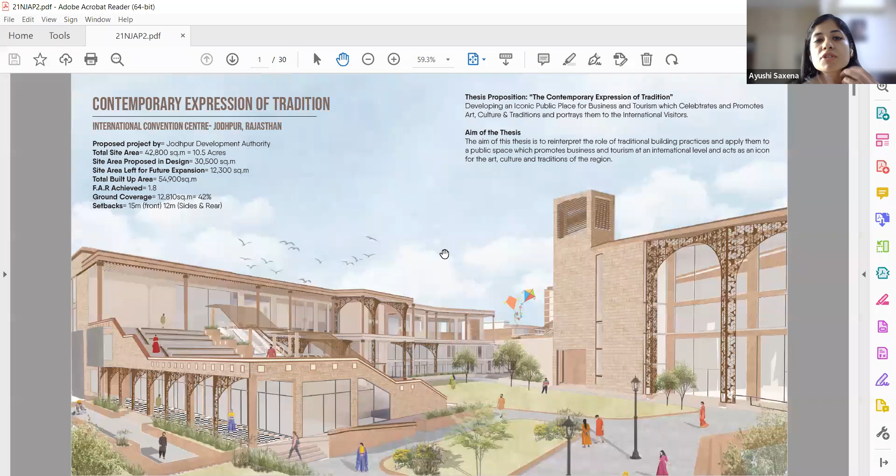For me, I felt that with the effects of globalization all around, everything is becoming too standardized. Especially living in Delhi, looking at the Gurgaon buildings, it was all international standards. Somewhere we were losing out on what our Indian traditions and cultures are and how they are manifested into physical spaces. That really touched me, and that is why I chose this topic.

Then I picked up the International Convention Center because it was a great way to represent this proposition in the form of a project. The thesis proposition read as: developing an iconic public space for business and tourism which celebrates and promotes art, culture, and traditions, and portrays them to international visitors.

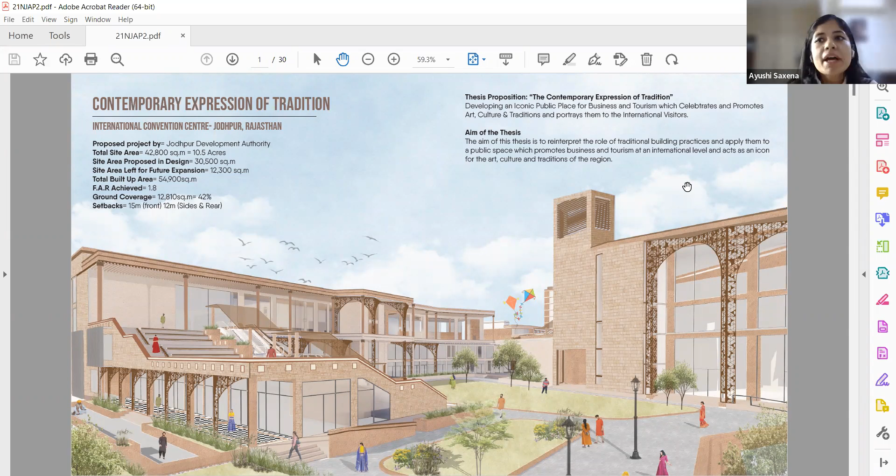So that was the thesis proposition. When all of you are choosing your thesis proposition, keep in mind that it should be something you're really, really passionate about.

For the thesis, we had our dissertation in the semester prior, and I had chosen a topic on similar lines: the remnants of tradition in contemporary sustainable building design. I studied around 9 buildings located in areas with rich cultural and traditional heritage, and how tradition is manifested into contemporary buildings and what architects are doing there.

Because it was a semester-long project, it gave a nice research background to my thesis project in the semester ahead. So if you've already done your dissertation, and it aligns with your interest, it could be a good idea to take a thesis topic that relates to it, so your dissertation research can back up your thesis.

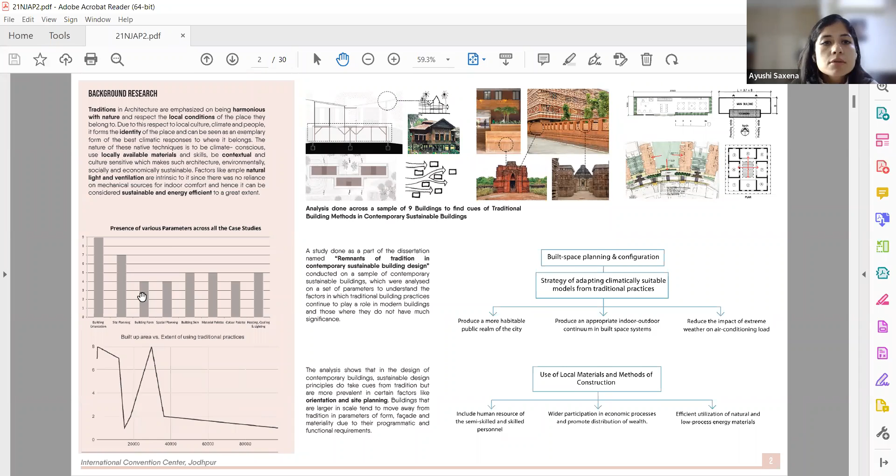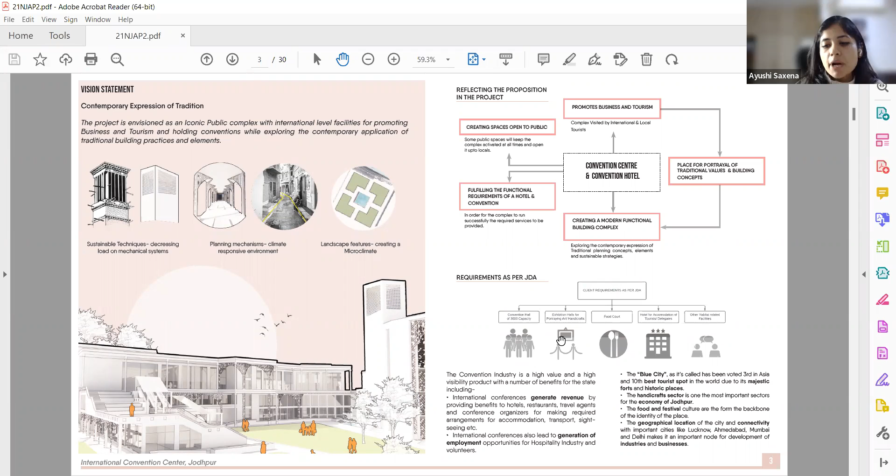Coming to the main building I designed, it was a proposed project by the Jodhpur Development Authority. They had already given certain specifications for what they wanted in the project, which was a convention center, a hotel component, a food court component, and stuff like that. From there, I started understanding what components would be part of my final project.

To start the project, it's very important to begin with certain research, so I decided on 4 topics to research before beginning. Because when we're given a blank site profile and just start with whatever comes to mind, we don't really have information to back up our designs. That's why research becomes very important before you start sketching and designing.

The topics I chose were: interpretation of tradition in contemporary buildings, specific to the climatic conditions of my project. My project was in Jodhpur, a hot and dry climate, so I looked at similar desert regions and modern buildings there. It wasn't restricted to Indian buildings—I also took examples from UAE, which has a similar climate, to see what architects are doing in contemporary buildings nowadays.

The second topic was climate responsiveness in hot and arid desert climate architecture, to understand what strategies people adopt in such conditions. Then there was understanding Jodhpur itself—its handicrafts, the culture specific to that place and to Rajasthan in the bigger picture, and how they've carried forward their traditions since ages.

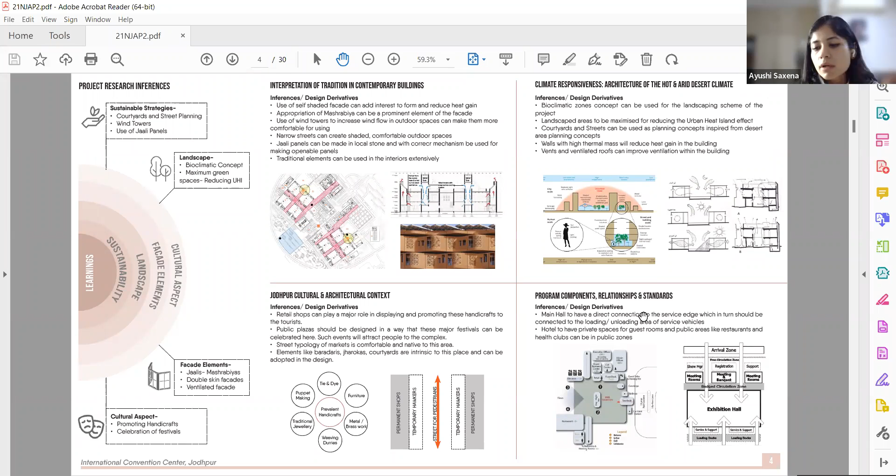To move ahead, I did certain case studies. Since the major components were the convention center and hotel, I took case studies under both categories. For convention centers, I took the Hyderabad International Convention Center and the Jaipur Exhibition and Convention Center. One important thing is to take an international case study too, because it gives you perspective on what's happening beyond the country and what else you can adopt.

To make the design stand out across the world, I took an example of the Vancouver Convention Center, which is very famous. There were certain insights I could draw from these case studies, such as having a public edge and a service edge in the convention hall.

Then the convention hall, which is the main hall where all the activities would be taking place, should be divisible, because there might not be a function at all times for 500 people. There would be ceremonies for 100 people, 50 people. Should be divisible. All services should be accessible to all parts of the division. So these were some takeaways which were really important in understanding the functionality of the convention center.

Then I went ahead and explored some examples of hotels, one of which was the JW Marriott in Delhi, because I could physically visit this. Also, our thesis was in the times of COVID, so going physically to sites and seeing projects was not possible for all of them. But whatever online material I could get, I did the case studies from that. But I think for you guys, it's now possible to explore and go out and see buildings physically, because that really helps you in understanding what actually a project is going to be like.

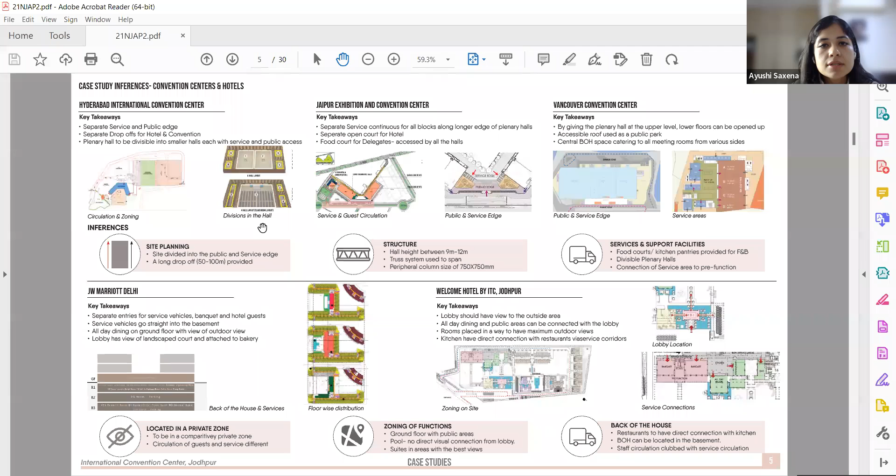So that was about the case studies. Then I went on to develop the area program after having enough insights from the case studies, from the research, etc. So like I mentioned, the major components of the area program were already given out in the tender document, which I had found online for this project, which was a government tender. However, there were some functions which I introduced on my own as well, because I thought they would be very important to first reflect my proposition into the convention center, and also it would help in generating employment for the craftsmen and other areas.

So that's why I proposed some functions on my own as well, and did not take the tender document as the final script for the area program. So I had a hotel, a convention center, some exhibition halls, some retail component, which was something that I had proposed on my own. And I also dedicated an area for future development, because when I did the mathematics and added up the areas for the different components which were there, it did not meet the FAR which was allowed for the site.

In your jury, there would be a question if you're not achieving your entire FAR, because there's a lot of money involved in such large projects, and now we are trying to design as real a project as possible. So it's important to keep that business aspect in mind as well. If you are not able to achieve the full FAR, which is totally fine because we have limited time and in 4 months it's not possible to do everything, then you must have a certain plan or area dedicated for future development, in which one might use the leftover FAR.

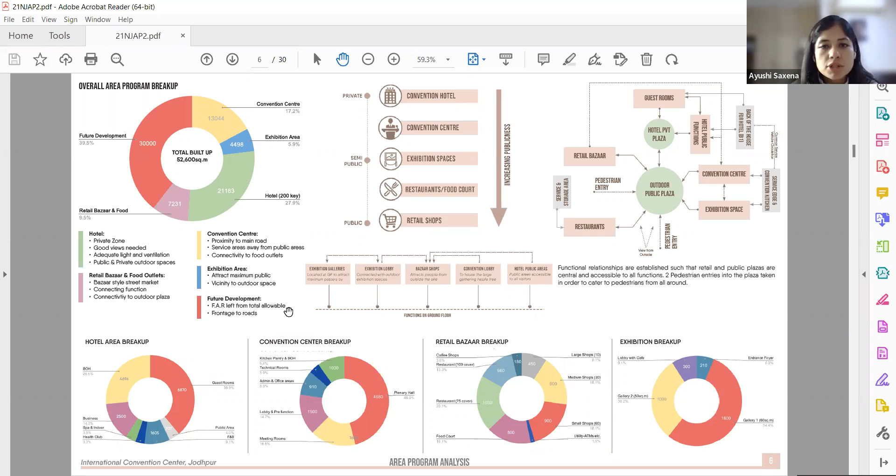So that is something which my faculty had told me very initially, and something which I kept on in my project. Then after having all the background insights in place, I went on to understand what my site is like.

So then I did a site analysis to understand where my site stood in context of the entire city. In my project, the tourism aspect was very important, so it was important to see where the hot tourist spots are, and where the airports and railway stations are, because these were the nodes where tourists would come from to my complex. For instance, if someone is designing a school, they might look at the location of other schools or residential areas, since that's where the main users come from. So it's important to understand where your site sits in context of the entire city.

Going into a more micro level, I did a climatic analysis where I looked at the sun direction and the ideal orientation for my buildings. I deduced that a north-south orientation would be best to cut down heat in such a hot and dry area. So the orientation was important, and I also analyzed the wind direction.

And I looked at the views, because it's a touristy sort of place, so the views of the entire city became really important. People would want to stand and experience the entire city at once, so that was also important.

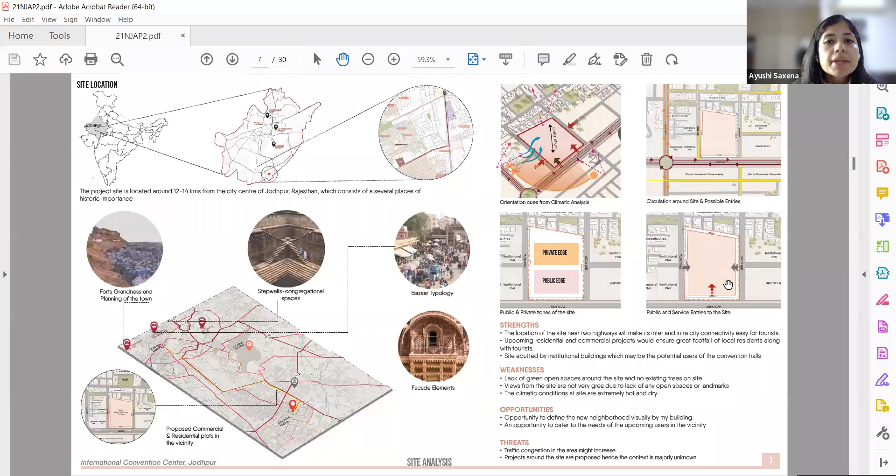Then, to finally put all these thoughts, the background research, the area program analysis, and the site analysis to paper, I started taking certain concepts and inspirations from traditional structures, because at every stage we have to remember our proposition and what we wanted to do in the first place. So I looked at a few examples of traditional forts and palaces in the region and got inspired by their form.

Then I started putting all the masses, which were a function of the area program, and placed them on the site, introducing courtyards because this is something I'd seen in traditional buildings, which helped me arrive at the final form of the place. So as you can see here, this is the final concept diagram I prepared for my design.

If I had shown this concept diagram on the very first slide, there could have been a hundred questions -- why is this placed here, why does this building look like this or that. But for each and every thing, you need to have that why, that answer, and for that, the background research is really important.

So all the slides I showed before this -- the case studies, the research, the site analysis -- all gave me the factors to put into the site and have an answer for each and every design decision. It's very important to pay attention to the part happening before your sketching on site, because that's what gives you the basis for the design.

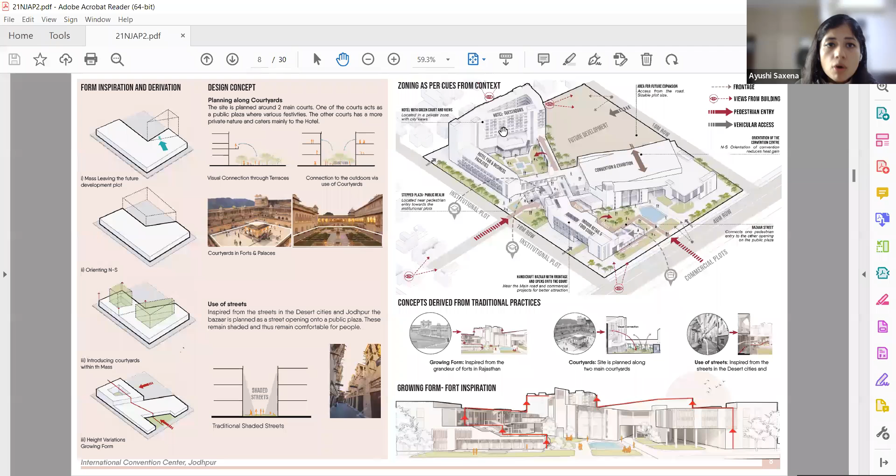So all those ideas were put together into this concept diagram, and this is what I had formulated. This is also the design development of my entire design.

Initially, it started with a very basic thermocol model. Thermocol models are a really good tool to iterate -- even SketchUp is great, but thermocol models give you a lot of flexibility, because you can cut out those masses and place them in multiple ways. It just takes a few seconds to place them like this or that, and you get a much clearer idea of what your form and functions look like.

So at the first stage, I had done the planning and concept development, and as you can see, the future development plot was here initially.

Then I understood the strengths and weaknesses from this design, and took them forward to the next stage, where I did some planning of the functions within the blocks, and also changed the overall site planning.

So at each stage, your aim should be to maintain the strengths from the previous stage, remove the weaknesses from the previous stage, and also move a step forward in the design process.

That should be your aim with each of the submissions planned for you. And then, in the later stages, the spaces were detailed out, the landscape was integrated, some facade details were also integrated, and so on.

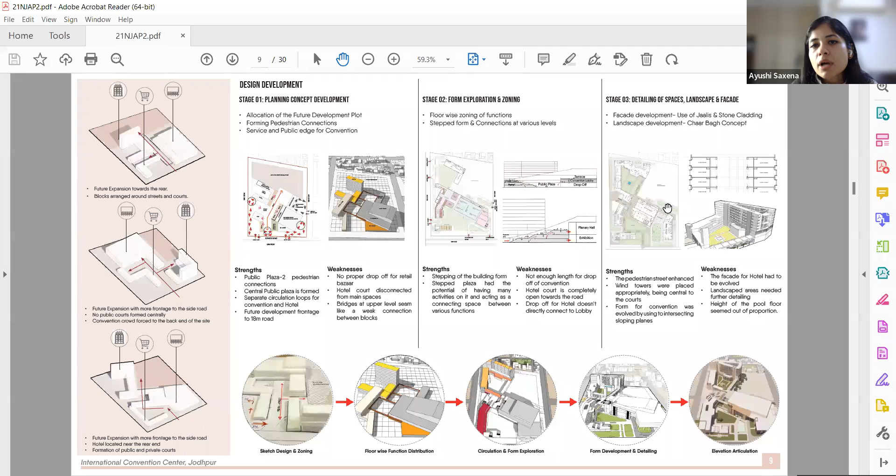So now coming to the final design drawing. This is what the entire complex looked like. This is the site plan of the site.

And this is the most important plan, I would say, which you would present in your final work. And this would take the most time to develop also.

So here, like I mentioned, I took the entries for the convention center from the main road. This loop had the exhibition drop-off as well as the convention lobby drop-off.

Then for the hotel and retail, the entries were taken along this edge. The service entries were taken along the right side edge for the exhibition and convention, because these require a lot of servicing. Also, the site was developed along two courtyards, two main plazas.

One was this public plaza, which was of a more public nature, with more public functions around it. And the hotel plaza was imagined as a calmer space, dedicated to the hotel functions, with a more...

...very formal sort of landscape design, in the Chaar Bagh concept and stuff like that. So this was the final site plan for my site.

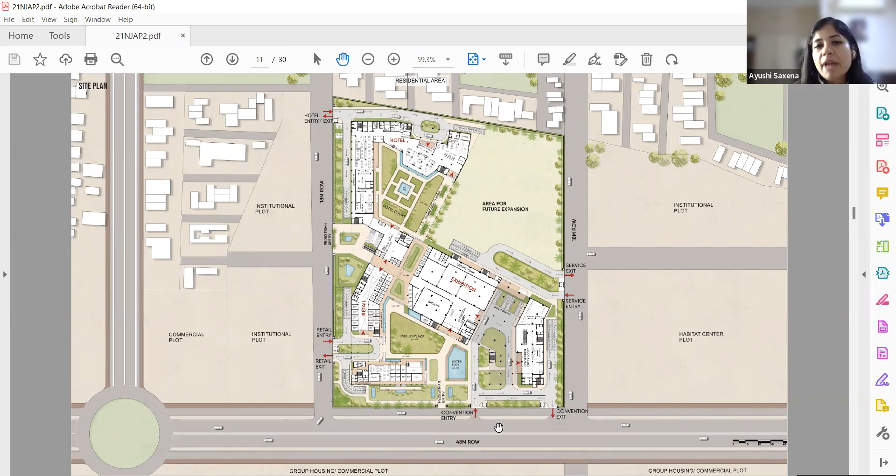And I would advise everyone, if you're spending maximum time on any plan, that should be your site plan. It should look very well thought of.

Then coming to the floor-wise program distribution, such a diagram, an exploded axonometric, really gives the viewer a good understanding of how you have divided the functions floor-wise.

So for me, in the hotel part, I had the lobby area on the ground floor and the all-day dining on the lower floor. Then followed by the specialty restaurants and then the business center, above which we have the spa and pool area.

And on top of it were the rooms. So the most public functions, accessible to all, were on the lower floors, and others were on the upper floors. And all these insights you gather only by doing case studies of similar buildings.

And I think that should be your source of inspiration for understanding the functionality of any kind of function.

Then for the convention center, I had the exhibition lobbies at the lower floor, because these would attract more public, rather than the convention center, which one would visit only for a meeting or something.

And then we had all the ancillary facilities and the admin areas above it, and then the main convention plenary hall at the topmost level.

It's important to put in all your admin areas, service areas, etc. into your design at this stage, because that shows your understanding of the entire component you're designing. So that's something to keep in mind.

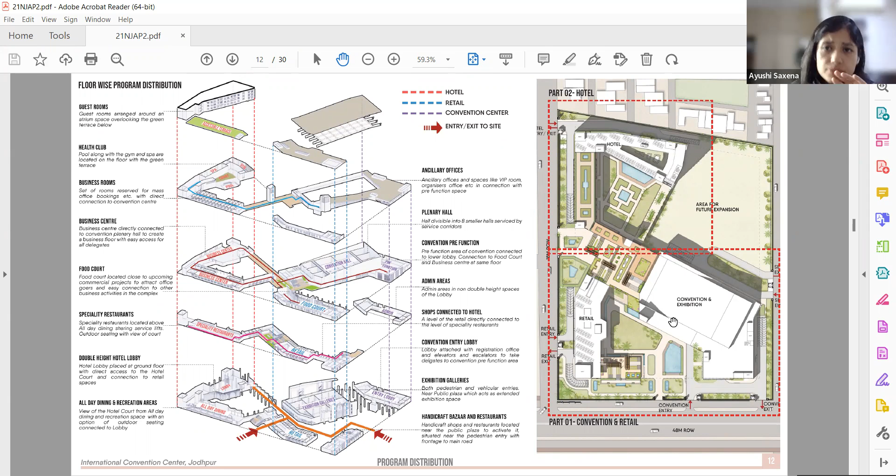So I'll begin with the convention part of the site. So here we can see...

...how the retail street starts from the pedestrian entry itself, and then continues over here and goes on till the hotel also. These are all the outdoor shops which line this pedestrian street, and it curves around the public plaza.

So when a pedestrian enters the site, they can experience all these shops and the festivities happening in the public plaza.

Also, there was an indoor retail component given because there are certain jewelry shops and gemstone shops which are very important for a region like Jodhpur. So these needed a more private and an indoor environment, and they were given in the indoor shops. And then obviously we can see the exhibition galleries and the convention entry lobby, which goes on the above floors.

Also, for the purpose of the presentation, I had actually highlighted the very key parts of the plan because when you're presenting in your thesis jury, you'll have like 10-15 minutes to present your ideas, and at that time it's not possible to talk about each and every part of your plan. So it's very important to highlight what are the main features which make your design stand out, and then it's important to graphically also highlight them.

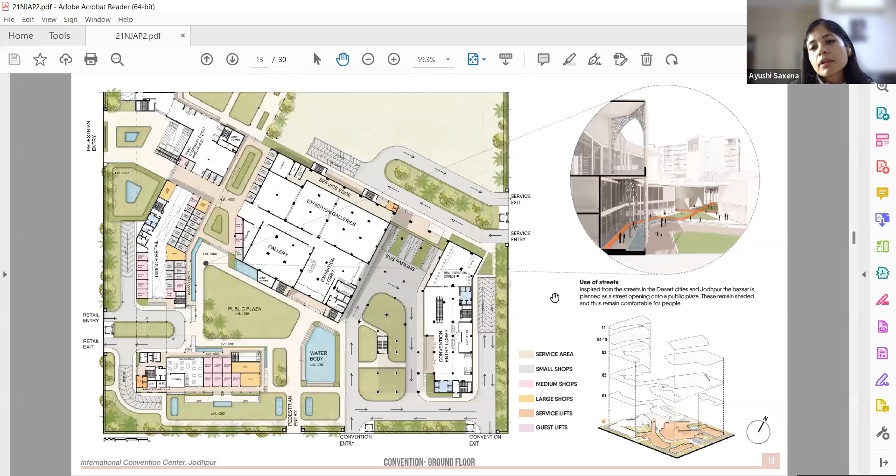Like here I've talked about the use of streets, which is a traditional planning concept also. So this was the retail bazaar street. It also had, because it was a multi-level thing, it was stepped, and these terraces were all also accessible, which were inspired from the stepped gardens in forts and palaces.

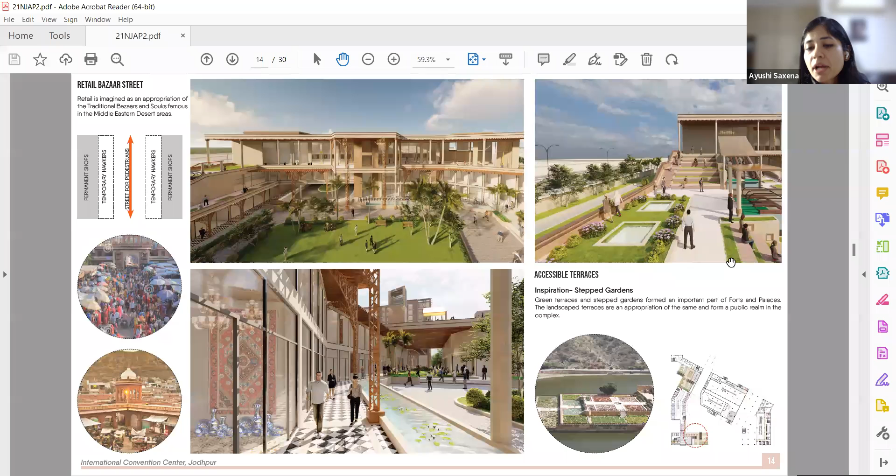Then coming to the above floor, we can see how these terraces have a visual connection to the public plazas on the ground floor. So the visual connectivity was important over here. And other spaces we can see are all double height spaces on this level.

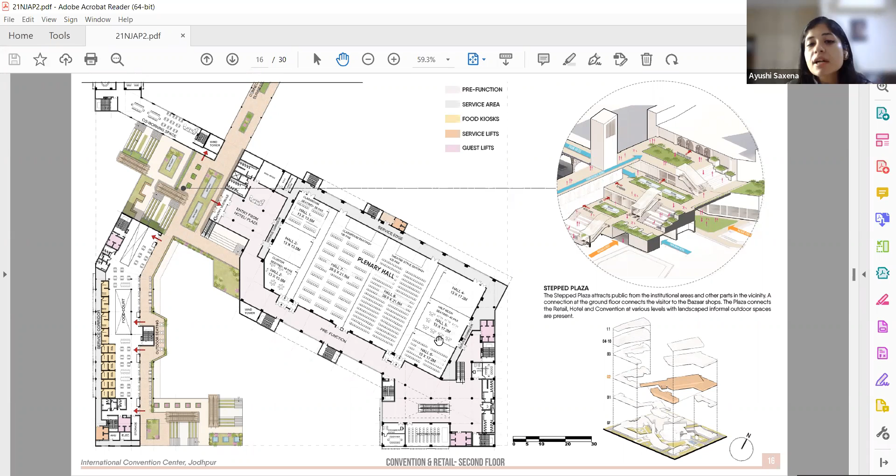And then this floor had the food court and the plenary hall, and also the location of the food court was very strategic because there are breaks in between the meetings when the delegates are coming to the plenary hall, and then they have to go out for a lunch or something, and then the food court comes very handy.

Also, the stepped plaza is a place where these people can relax in between the meetings, and also the positioning of it was kept over here because it was closer to the institutional areas, and the students could come here as it was a very porous site, and they could relax in their free time. So that is why it was positioned like this.

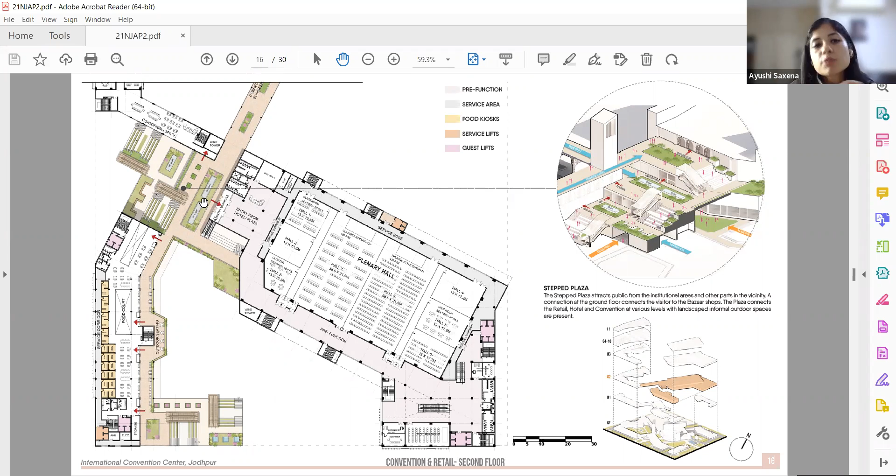This is the view of the stepped plaza. All these 3Ds and renders I had taken out to explain what the spaces would ultimately look like.

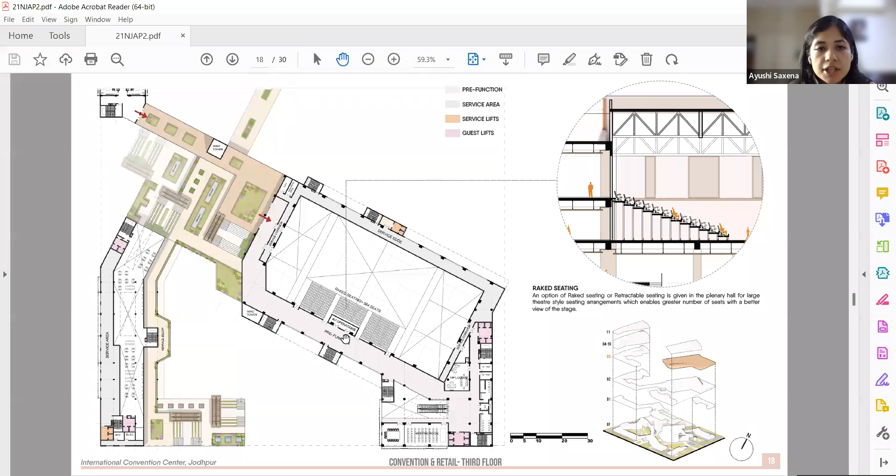This is a section through the plenary hall which shows the trussed roof and the sloping roof of the site.

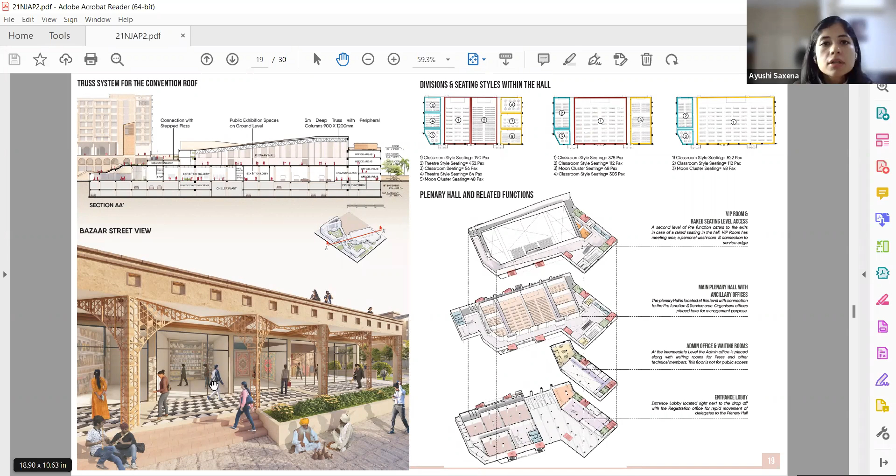Also here we can see a view of the bazaar street, which is the retail street, and how the artisans and the local craftsmen are also getting employment and are getting promotion and recognition because of the introduction of this area program feature. So that was about the convention hall.

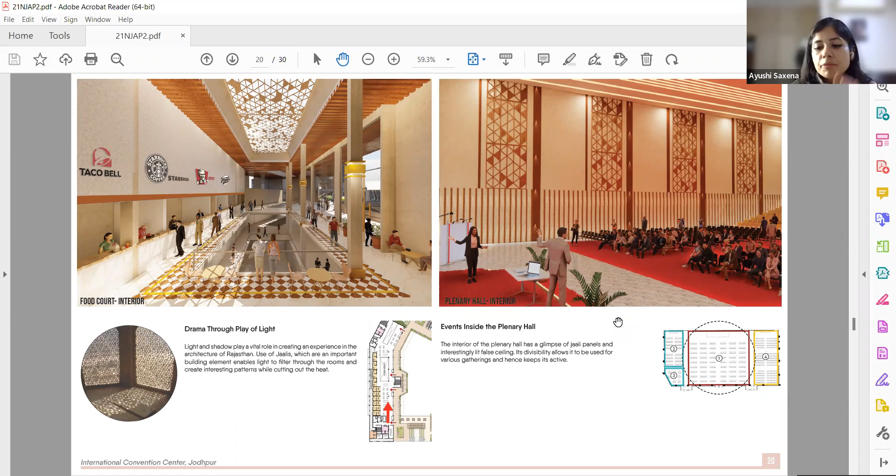These were not something which was just plunged onto the facade, but they were also very well thought of in terms of how the visual quality of it is going to be like and how it's going to look within the entire form. So something which is a norm, a bylaw that you have to give, can also be very well articulated in your design. That is something we should keep in mind.

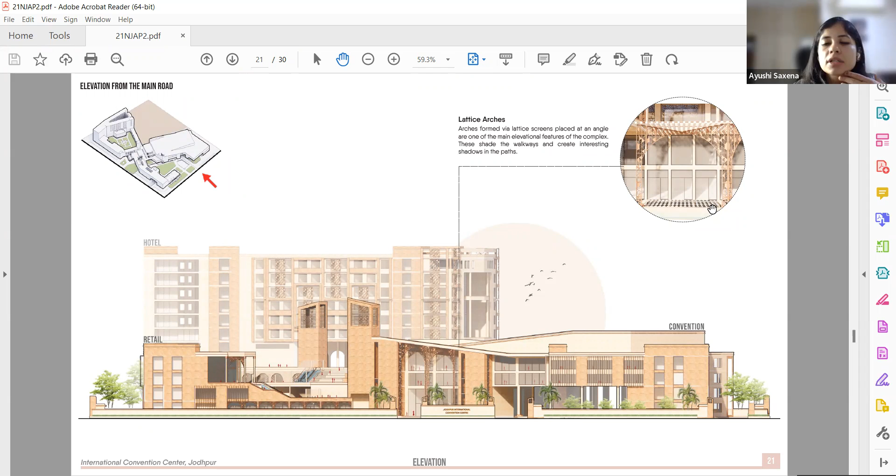Then these are the wind towers which were there, again an inspiration from traditional buildings, used to keep a cool wind flow within the outdoor spaces of the complex. And then there were these lattice arches, an appropriation of the traditional arches. So it's not just an arch, but it accentuates the walkway in front of the retail street. So these were the visual elements.

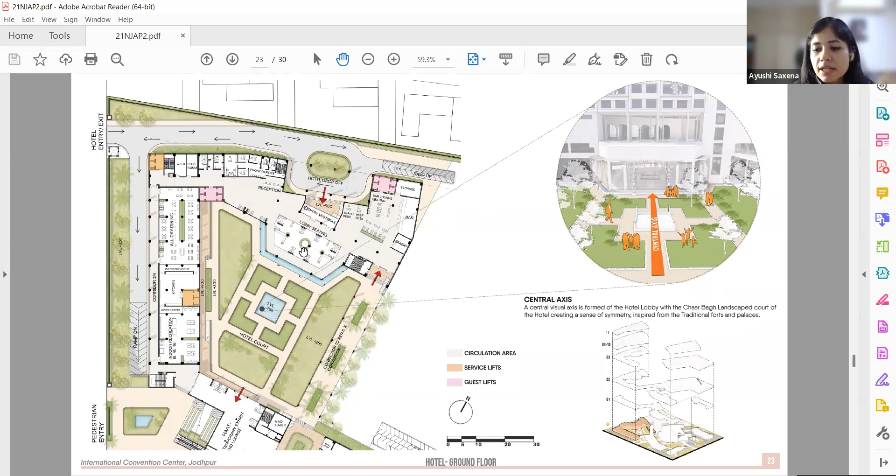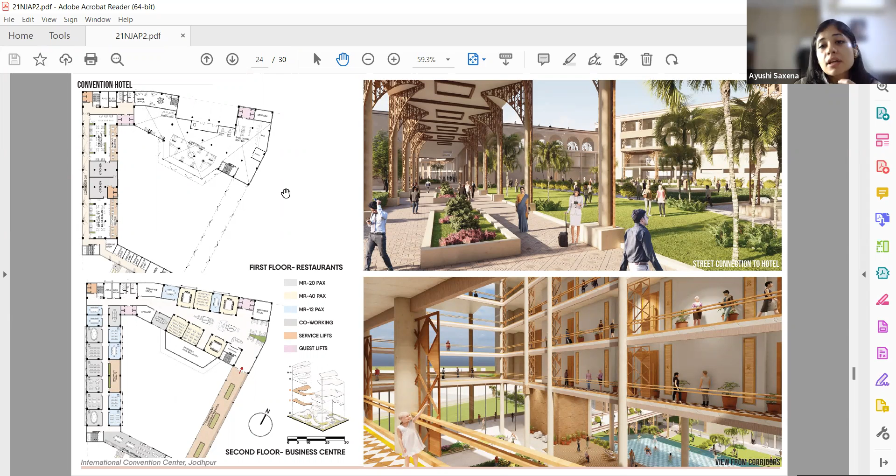Within the hotel also, I did not want a typical doubly loaded typology, because that wouldn't reflect my proposition well. So even though it was a high-rise hotel, I integrated a courtyard within the built block, and the opening form was a derivation of that, because I wanted to introduce this courtyard space in between so the corridors could look onto it and not feel stuck inside a space at all times.

So this is what the green terrace looked like. It was located at the pool floor, so this floor became like a very outdoor sort of environment, even though it was inside a building. The gym, pool, and spa were located over here.

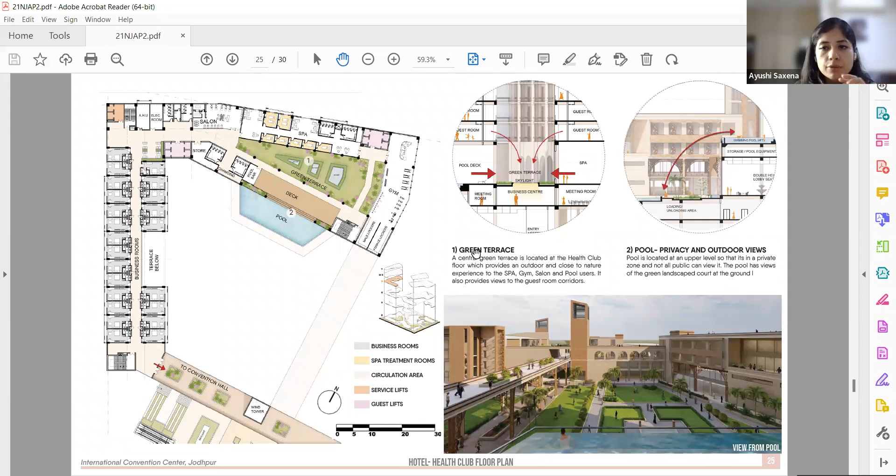Then the placement of the suites was also very important in a hotel, which is something I learned from my case studies and prior research, that the suites should have the maximum views and be located in the best possible locations. So on the topmost floors, I placed these suites which had a two-way view of the greens of the future development plot as well as of the hotel courtyard. This was a well thought out decision.

And then this is a section cutting across the hotel, which continues to the retail space, etc., and some parts of the hotel are also visible in elevation.

Drawing sections, not as an end product but as a part of the design, is important, because initially when I had drawn these sections, some parts seemed very flat or boring, and the experience didn't seem very exciting for the users. That's where I got to know these are the areas I needed to work on, and ultimately I was able to come up with this section. It had a lot of iterations prior to it; it wasn't like the design is done and now I'm going to cut the section. It doesn't work out like that.

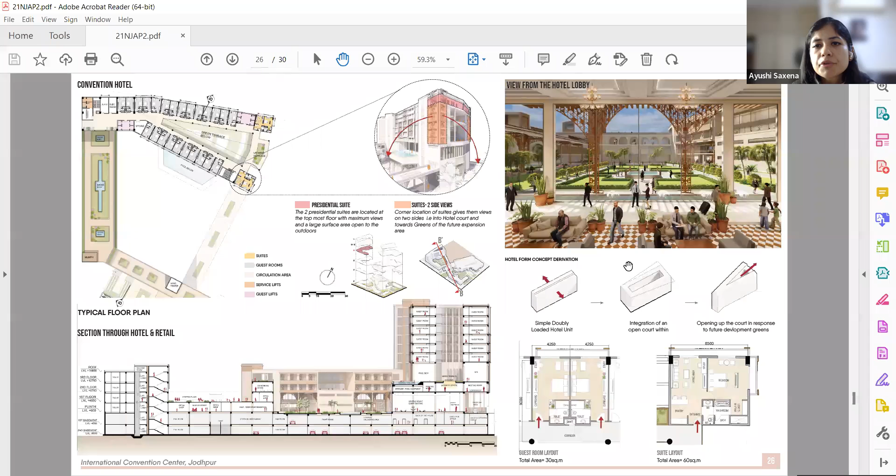Then coming to the technology part of it, because in my college it was important to detail out what tectonics you are incorporating within your design, what your structural system is like, what the HVAC systems are like, because at this stage, after doing all these courses in bits and pieces across all your semesters, it's important to combine all that knowledge into your thesis project.

After that, what's the roof insulation going to be like? Because the roof was a very large area on top of this plenary hall, and we had to keep in mind the heat reduction from this roof system.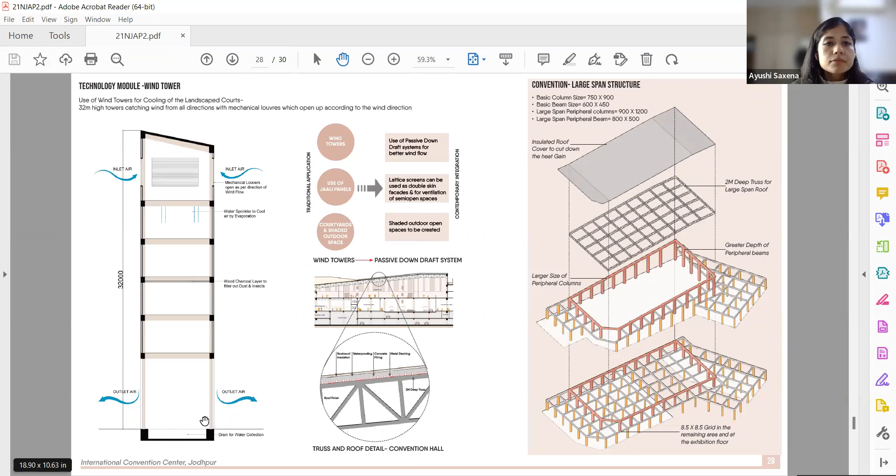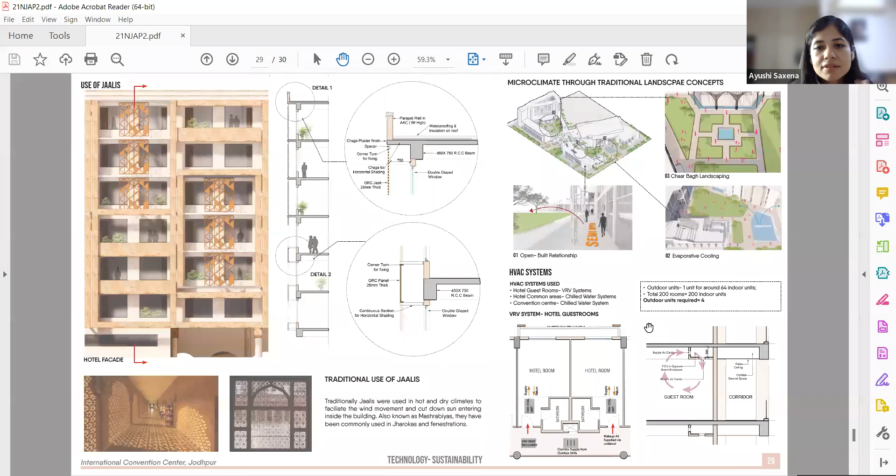Then yeah, this is just the last slide. So I think my presentation - now I can take any questions if there are. Thank you so much.

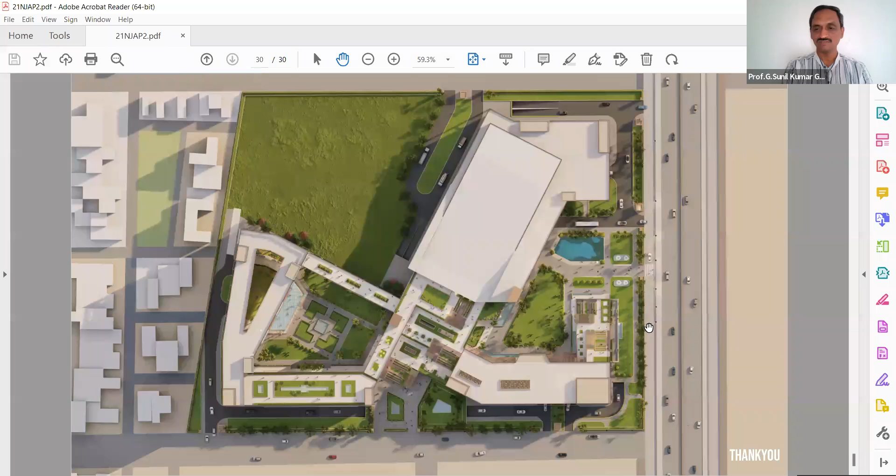Congratulations on winning the gold medal, Ayushi. And actually, the work that you have presented here was so detailed and so meticulously presented - the sections, plans, elevations, the views that you have rendered.

So you might have used multiple softwares, right? To get definitely - can you tell something about that? Right, so I had used AutoCAD for all my drafting, but before that there were a lot of sketches which were done by hand. So that was the first stage. Then the drafting was done on CAD, and I used SketchUp for my 3Ds, and then I used Lumion for my renders. So it was a combination of a lot of software.

But I would definitely suggest, if you guys know Revit and are comfortable using that, it's a very good software to work on, and I've worked on it earlier. So that's something which is an all-in-one sort of combo, so you can use that also.

Okay, yeah, like you might have done a lot of planning how what should come on what sheet, right? Because I saw you using extensively axonometrics, blown up axonometrics - axonometric itself is a big effort, and you have used axonometrics very thoughtfully, and the sections also very thoughtfully. So yeah, even that might have taken a lot of effort for you to figure out what you want to present, how you want to present.